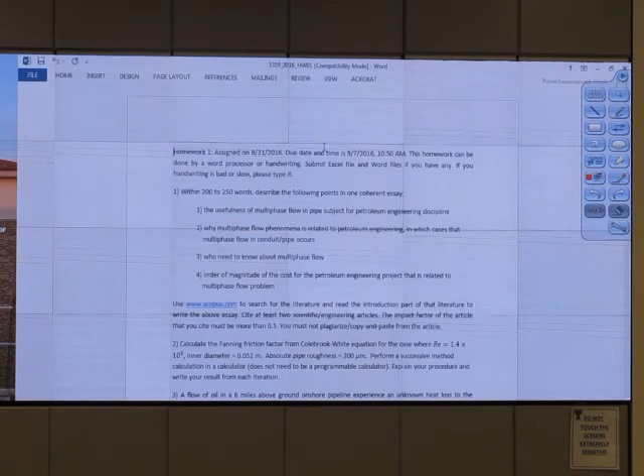Let me show you how it looks. Question number 1: write 200 to 250 words in English, okay? Everyone sign it?

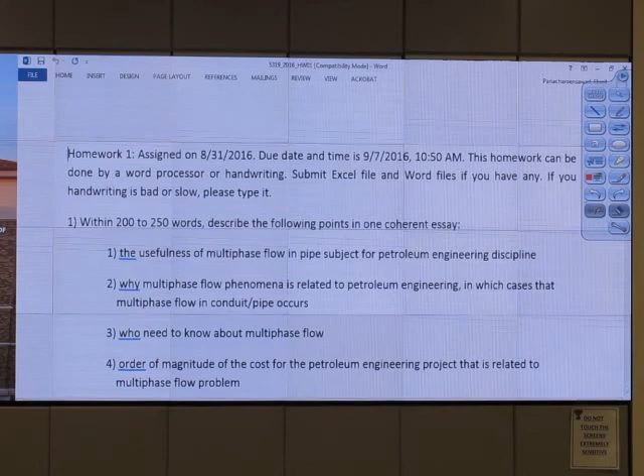So this is just about 200 to 250 words, and you want to tell the usefulness of multiphase flow in pipe subject for petroleum engineering discipline. Why should it matter to you? And you should tell several things. Use scopus.com, which you can access when you use the university network or VPN.

Or if you want to do it in the library, there's a free computer for you to use. Also, we have a drop-in computer lab. Has anyone used the drop-in computer lab before? I think nobody uses it, but you're actually allowed. Okay, drop-in computer lab, TTU.

For the engineering department, we have computer labs for civil engineering and mechanical engineering. This one is the old petroleum building. This is the time that you can go there and sit.

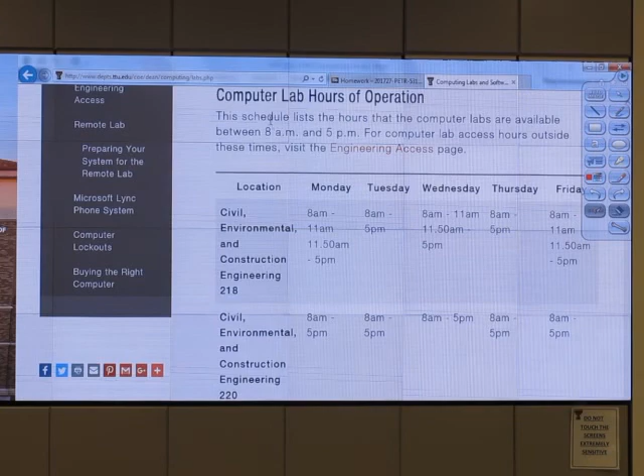You may need to do that because I asked you to use scopus.com to search for the literature. Read a couple lines, the introduction part of the literature, to write the essay. So you want to tell why should this topic matter at all? What is the importance of this topic?

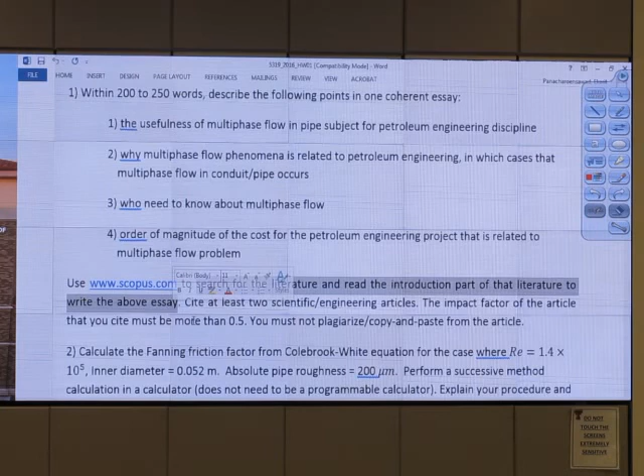So I know that you understand it from what you learned from me. In addition to that, you will cite literature. You may say, okay, this paper from this group of researchers says that multiphase flow is used in nuclear reactors and also in pressure drop subsea pipeline calculation. So you cite just 2 papers.

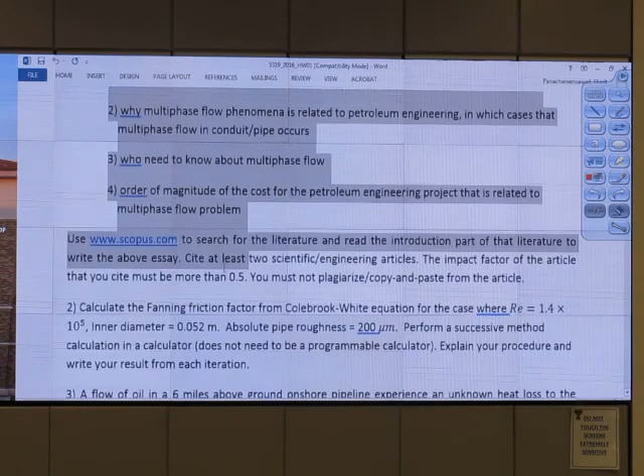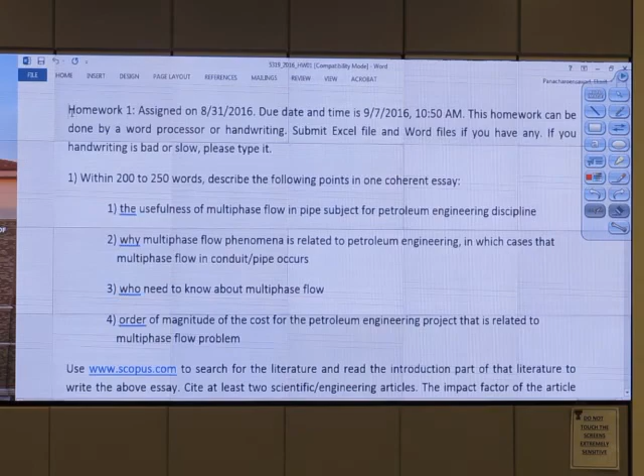So 200 words, it's not quite a lot. 200 words is how much? From the first line to here, this is 164 words already. 200 words is... this is 300 words. So it's not a lot, 200 to 250.

Second question: calculate friction factor. I just told you how to do it, so you should be able to do it.

Number 3: temperature profile, pressure profile with some assumptions. We are going to talk about it now.

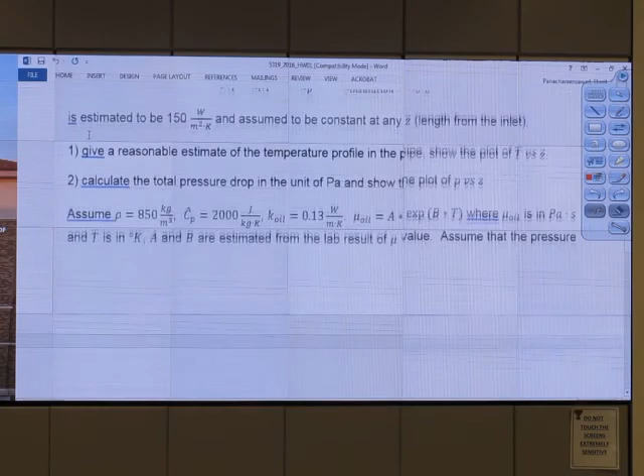And number 4: calculate the thickness of paraffin deposition that makes the pressure drop increase by 20%. This may seem new, but don't worry about it too much. Paraffin deposition is something that deposits in the pipeline and makes the flow area shrink. So if you have 1 millimeter of paraffin around the pipe, the flow area reduces.

When the flow area reduces, the fluid may flow a little bit faster and we have more pressure drop. So if the flow area reduces to be very small, we have a lot of pressure drop. So the question is just how thick should that deposit be to make the pressure drop go up by 20%, like go from 100 to 120.

This is a horizontal flow. The equation is 2F rho V squared over D, that is equal to minus dP dz, accounting just for frictional pressure loss. No gravitational term is needed because this is a horizontal flow.

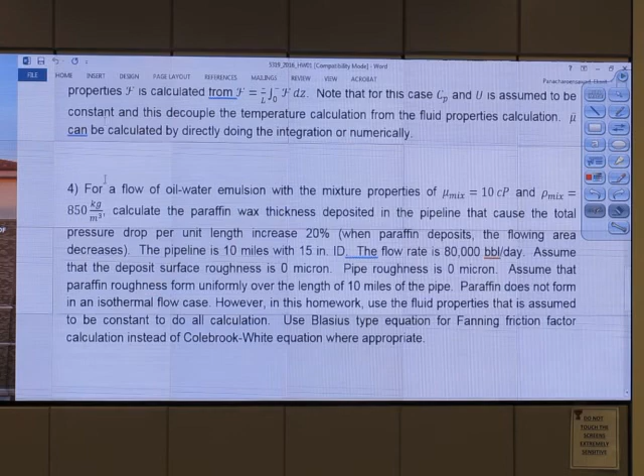This one you should be able to do already. Number 3 we cover in this class. The objective of this class is to review more material for single phase flow. Okay, we're still in single phase flow.

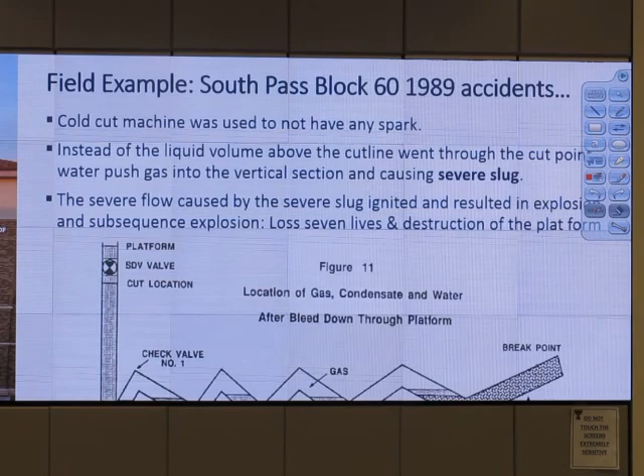So this part you get it right, how severe slugging happen in the field condition.

The equation that you use for question number 4 is just this one: minus dP dz equals 2F rho V squared over D. And it is smooth pipe, I assume the deposit is smooth and the pipe roughness is 0. So you use this equation with Blasius-type equation. Blasius-type equation is this one, see this? If you use Fanning friction factor from Colebrook equation, you can also do it, but it is somewhat more difficult, kind of a lot more actually.

Use this one, make everything easy. What I would suggest you is to use pressure drop ratio. Pressure drop ratio means this term before and after wax deposition. For those of you who have done similar questions already, do it again without looking at the solution you might have from any other class. It's not that difficult.

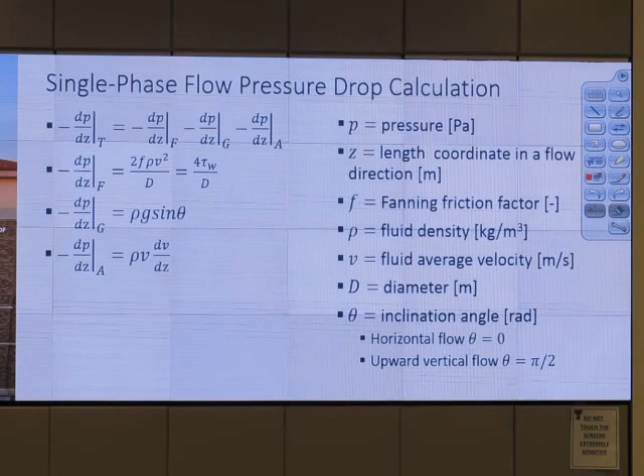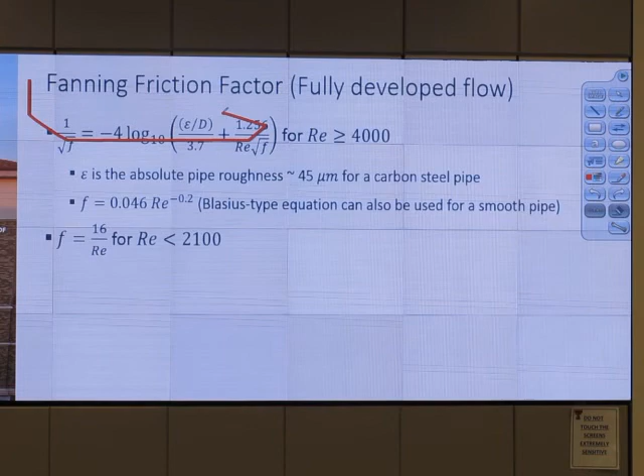All right, I show you how to use successive method to calculate Fanning friction factor. So this is one equation, one unknown. We can use Newton-Raphson to do calculation too. You did it by your successive method, that's pretty easy to put in calculator. For one equation, one unknown, we can use Newton-Raphson. This course is not to teach you how to do numerical method, but just tell you a little bit so that you know it can be done even in Excel.

Newton-Raphson means the next guess of friction factor equals the initial guess minus some function divided by slope of that function. Alright, so we have one equation, one unknown, which is this one.

1 over square root f plus 4 log base 10 of this. You see this? If we put the right value of friction factor, the right value of f, we put it in... What happened? Correct. If we put f, the right value of f, this term, the first term will be equal to the second term, and it will be 0. If the value of f is not correct, it will not be 0. So we are trying to find value of f that makes this whole thing equal to 0. If I don't use any numerical method, I do it in Excel. I just plot this function at various values of f and find out which f makes this function equal to 0. You still with me?

You need Excel to show you. By the way, for the project, you need some kind of calculation, but you don't even need to do anything in VBA. You can if you want, but you don't need to. You can do everything in Excel front. And you can also use Goal Seek, Goal Seek is allowed. Alternative to that is use Newton method.

This is to show you how to solve it a different way. So we have function f, capital F, and small f. So small f, we say, okay, 0.00001.

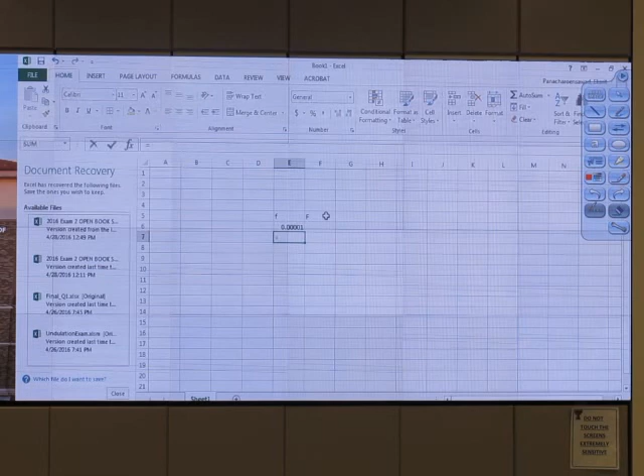Don't see it, right? Okay, enlarge it. Equal to this one multiplied by 2.

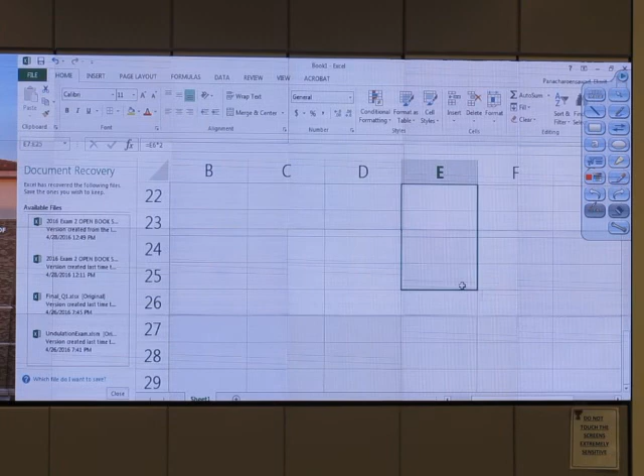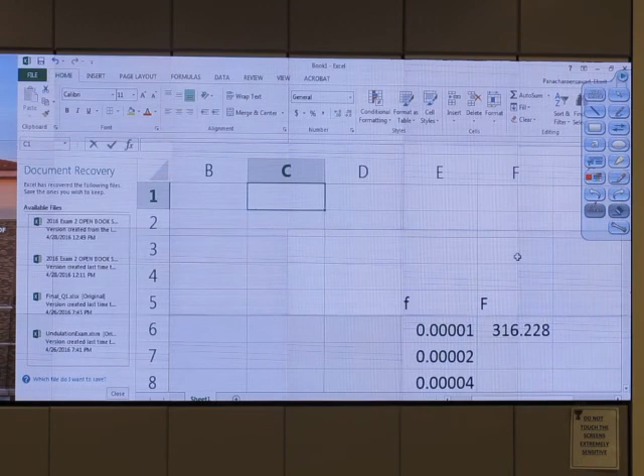And this function f is equal to 1 over square root of this term, plus we need Reynolds number and friction factor, Reynolds number, epsilon, d. Epsilon equal to 0.0002, d is 0.05, Reynolds number 30,000.

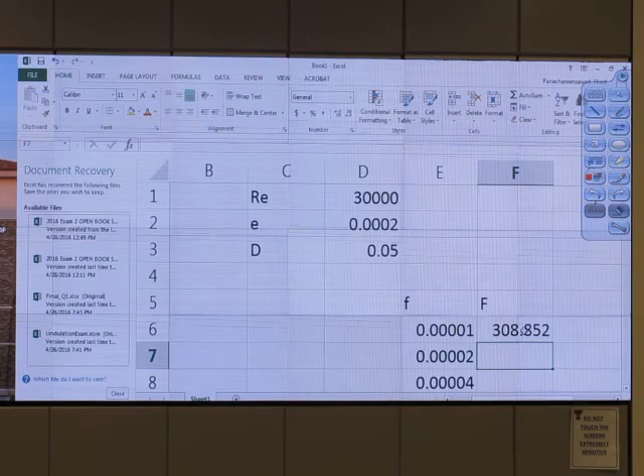So I get 300 something, which is too much, right? The log in here will be log base 10 already.

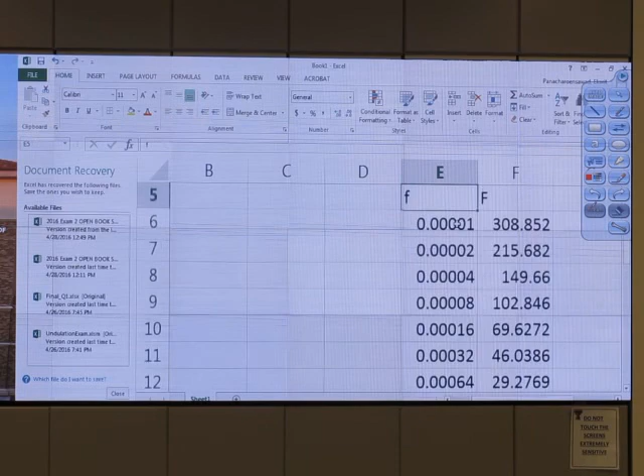So I plot my graph, insert graph, and when I look at this graph, somewhere close to 0, maximum let's say maximum of 50, minimum. So you see, at some point it crossed 0. The value of f that makes this thing cross 0, that is the right answer.

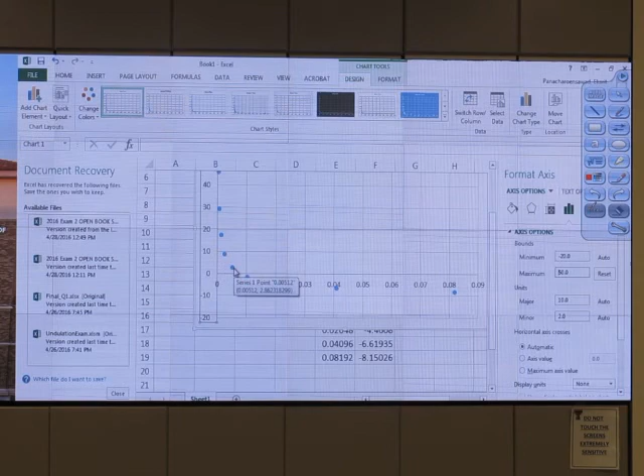So instead of trying to plot the graph, replot it again, we try to search for the value somewhere between 0.005 and 0.01. Instead of doing that, we can use Newton's method.

Newton's method, everything can be done in Excel without using VBA. So we start with an initial guess, 0.00001. That is the initial guess. And we have to calculate the function value and the slope, right?

And then we can calculate the next value. So the function value, I go back. Function value is this whole thing. That is the function value. So actually this is the function value, see, this is the function value.

Okay, we already have f, so next step we want to calculate. F is, okay, let me copy. This whole part is the function value. Next, I want to calculate f prime. Okay, f prime, how do we do any of that?

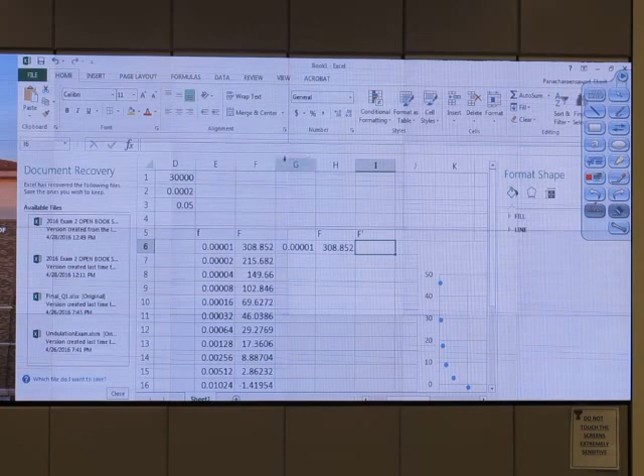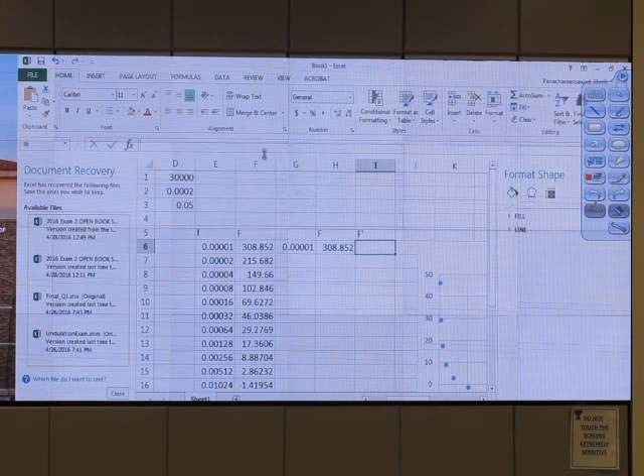So instead of taking the derivative, let's use finite difference approximation. Finite difference approximation means we use the same formula, but this time we add a small number, plus 1e-6, and over here, plus 1e-6. So we add a little bit into it, and then minus that whole thing, and everything divided by 1e-6. Let me put parentheses across this.

And everything divided by 1e-6. What is that telling you? That is a slope, right? Slope of some function equal to f prime.

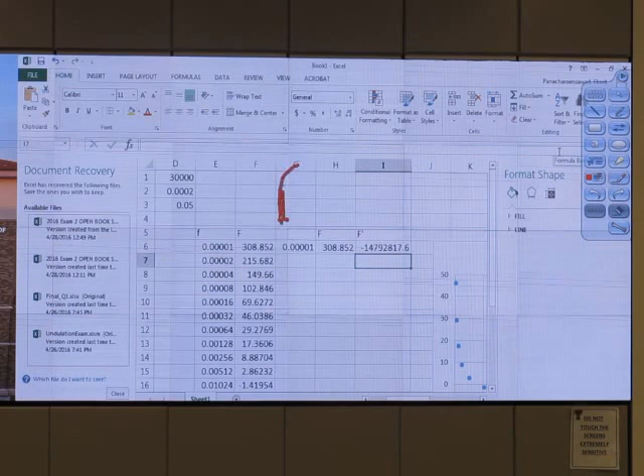F prime can be approximated. Let me type it instead, that may be better. So we have f prime can be approximated from f of x plus a small number epsilon, minus f of x, divided by epsilon.

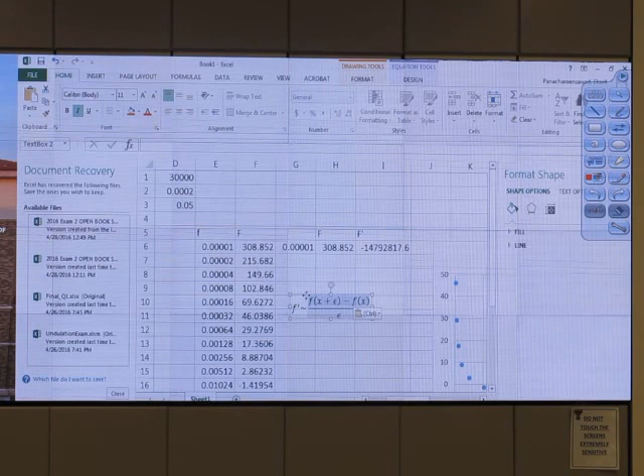Good, right? Now it's visible. So basically we use that formula to do the approximation. That is the definition of the slope, right? The slope is the derivative basically: that function, add a little bit, minus the current point, divided by epsilon. So now we have f prime.

It looks like that, and you'll notice it's kind of messy if you do it in here. If you do it in VBA, it's a lot cleaner. But my point is, you can do everything in Excel front. And next step is...

The previous value, let's check the formula: previous value minus function value divided by slope. So previous value minus function value divided by slope.

Okay, and we redo the same process. So what I do is just do the drop down like this. Is it done right? Not really, just step by step, each one.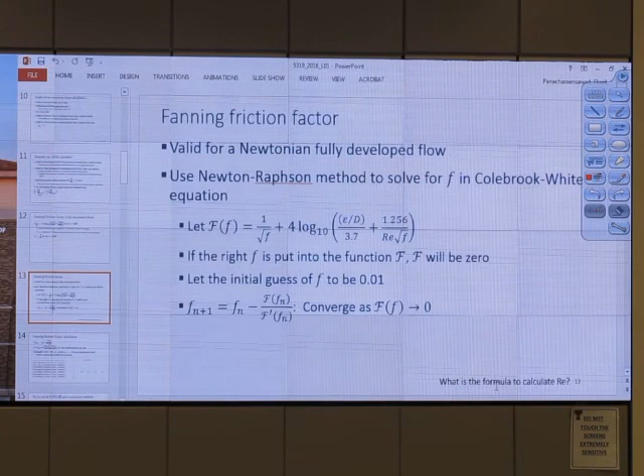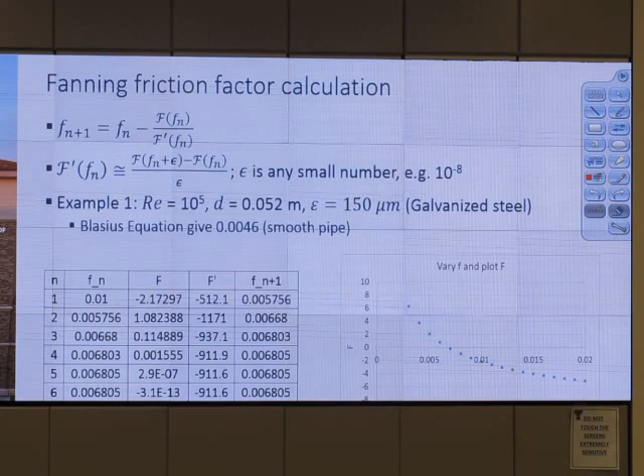So now I know for sure that you can do this, because I went over the example. So basically you can do this, right? Put the value in, find the friction factor. I know that when I upload that on the Blackboard it's kind of the solution for the homework, but please try it by yourself to see if you can do it or not.

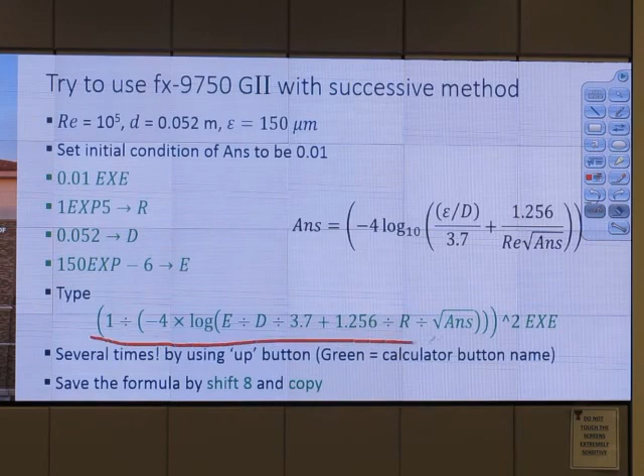This part we already went over, you remember this successive method in the calculator. Alright, so next step I will tell you how to do heat transfer calculation.

For heat transfer calculation, we start with the governing equation. This is the governing equation, the thermodynamic law, the form of total energy equation. So total energy is kinetic plus gravitational term plus enthalpy. This is the total energy of the system, and Q is the heat added to the system.

W is the work done on the system. So this kind of makes sense, right? If we add heat and do some work on the system, the energy of the system should go up. If I lift this cell phone up, I do some work, so the potential energy of the system goes up. This is the governing equation, in the D form. Enthalpy is defined like this: CP dT plus the change in volume multiplied by dP.

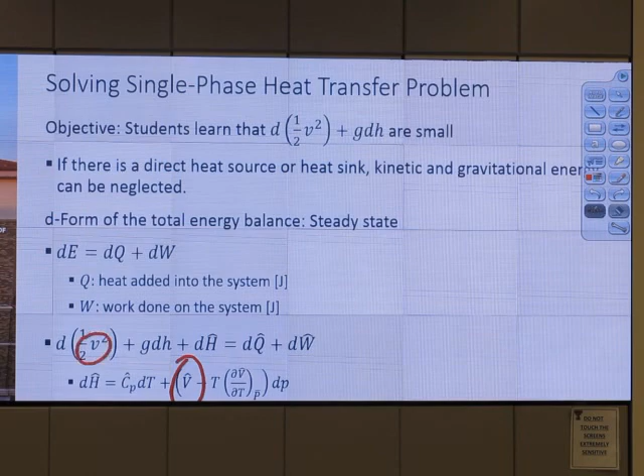Next slide is from Bird, Stewart, Lightfoot. So the total equation, after we substitute everything, looks like this. Q, heat added to or removed from the system, will be this part. If we add heat to the system, we have T infinity, the environment temperature, minus T. For ideal gas, sometimes you don't consider the change in V hat. V hat is not velocity, small v is velocity. V hat is volume per unit mass, specific volume, 1 over rho, meters cubed per kilogram. All units are spelled out here.

Alright, let's go over an example. It's nice if you can do it, if you cannot, it's okay. Will it be on the exam? No, I can say no. But we want to go over it because I want to show you that the heat term dominating the system isn't gravitational, it isn't kinetic, it's really the heat transfer.

So this system is flow in the heat exchanger. 200 pounds per hour of dry air enters the inner tube of the heat exchanger, shown in this figure, at 300 F and 30 psia. The inlet velocity is 100. The air leaves the exchanger at 0 F and 15 psia, so temperature goes down and pressure goes down.

So who's next? Yao Chen. When we have gas go through the heat exchanger and we have a pressure drop, why should the temperature go down? What is the reason that temperature goes down for this particular case when we flow inside the heat exchanger?

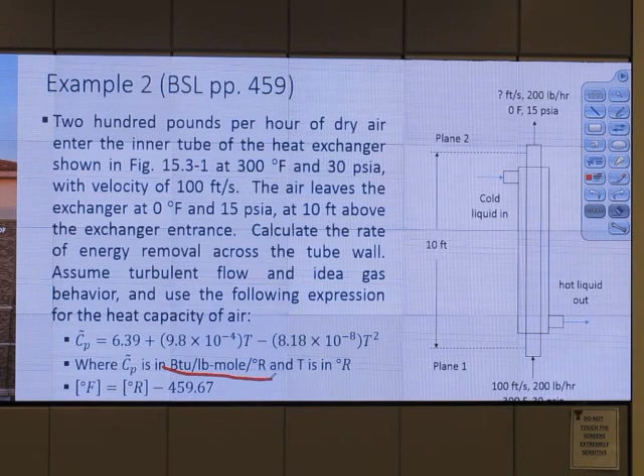What happens next is there's a bunch of formulas - basically substitute everything into the governing equation. The point I want you to look at is this term: 1/2 times V2 squared minus V1 squared. This is the energy change due to kinetic energy, the kinetic term - look at this, 0.093 BTU per pound mass, that is the kinetic term.

The derivation is this - the point is not for you to be able to do it. Kinetic term is 0.093. Gravitational term is 0.01, so the change of the system energy due to gravity is 0.01 BTU per pound.

I think this has to be M, not F. What about the change due to enthalpy? The change due to enthalpy is minus 72. We compare minus 72. So at the end, heat removal uses 72 minus that, minus that - one of them is the kinetic term, one is the gravitational term. Add them together and we get the heat removal.

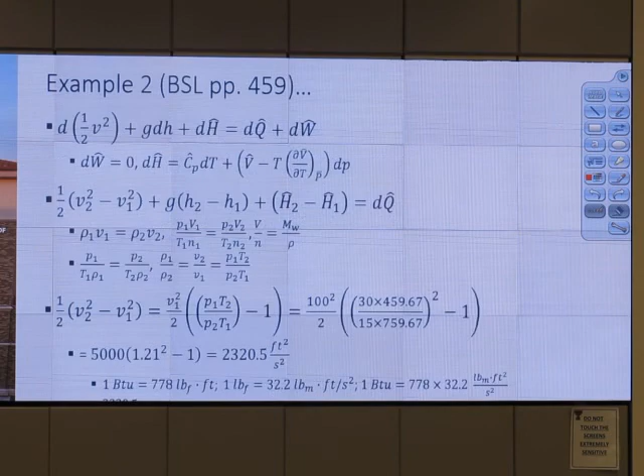And that has to conserve. So when I say radial heat transfer equals axial heat transfer, it's something like this: mCp multiplied by dt, that is the axial heat transfer, and this one is the radial heat transfer. This equation comes when we substitute every term into this part.

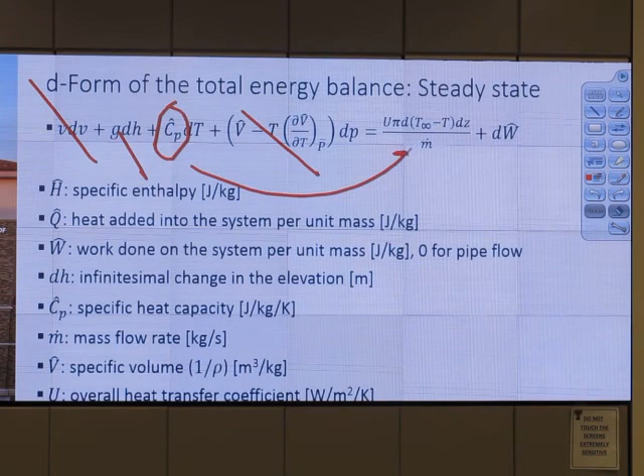See, or this one, see this one? dz is over there, so this term is gone, this term is gone, this term is gone. Move Cp to the bottom, move the dz over there, then we have this equation.

Alright, it's about time, sorry about that. Won't be long. Forgot to charge it.

Oh, it's still good. I think it will last for a while. All right.

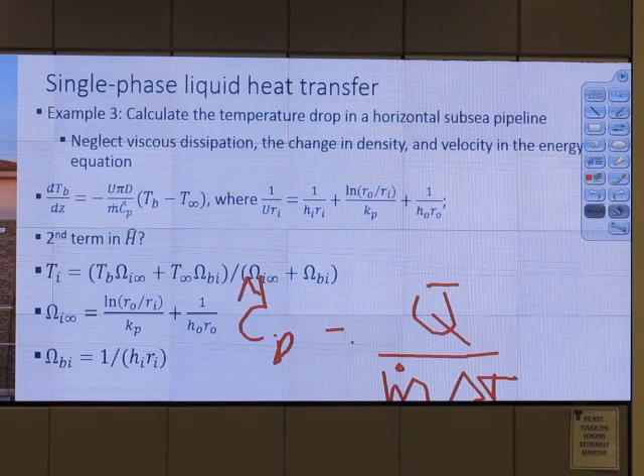So when we look at the definition of Cp, when we do the calculation: mCp delta T equals heat. So mCp delta T equals heat, which is Q. So Q equals m delta T... this one is Cp, right? So Cp will be, if we do this one, probably m dot. So m dot is kilogram per... is it like that? Joule per Cp, I have Joule per kilogram per Kelvin, so it's just m Cp. MCp delta T equals Q. So Cp is Q over m delta T, right?

Cp is Joule per kilogram per delta T. The unit of delta T, whether delta T is in Celsius or delta T is in Kelvin, is the same. It's not an absolute value. The time that you want to use absolute value is when you use PV equals nRT, the gas law. That is absolute value. All right.